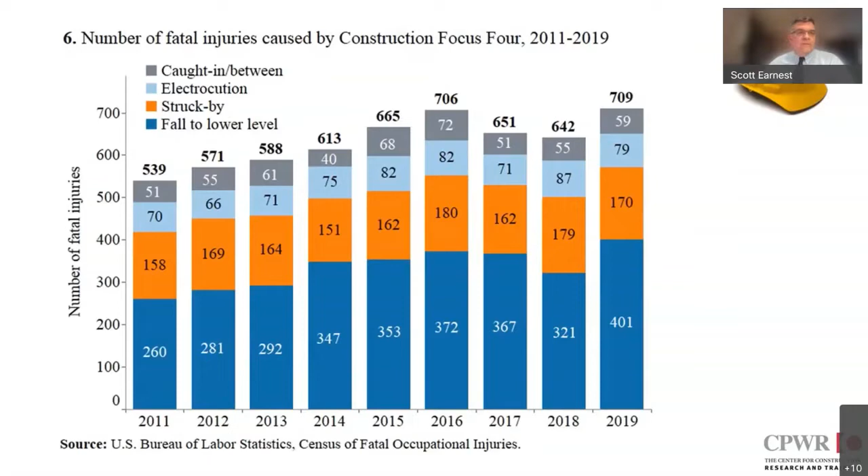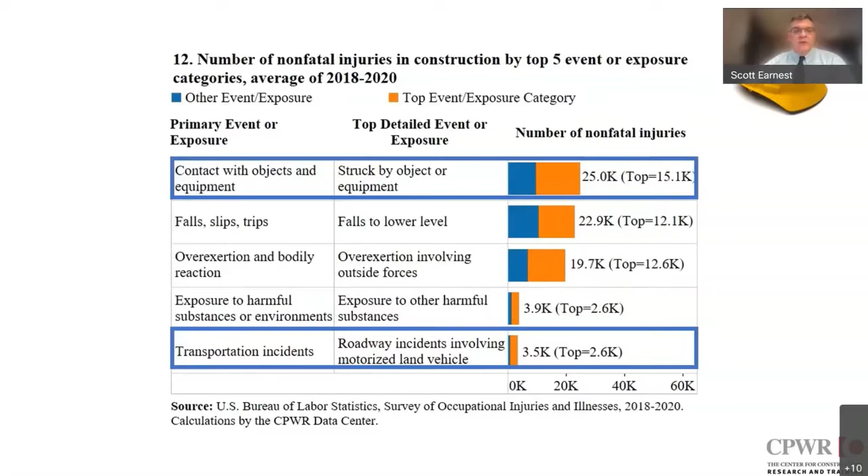I wanted to briefly mention the infrastructure bill. For those in the construction industry, the infrastructure bill will support transportation, climate, energy and the environment, and broadband. The type of construction projects that will be funded include rebuilding roads and bridges, upgrading and constructing transportation terminals and ports, repairing gas distribution pipelines, building a network of electric vehicle charging stations, replacing lead pipes, improving the energy efficiency of existing structures, constructing water distribution systems and treatment plants, and expanding access to broadband.

So again, there's going to be a tremendous amount of work going on over the next 8 to 10 years, and it's important that when this work is done, it be done safely. So we've developed a lot of different materials available on our website that can be useful, including the NIOSH website, the CPWR website, the OSHA website, as well as the ARTBA website. We just wanted to point that out and refer you to that.

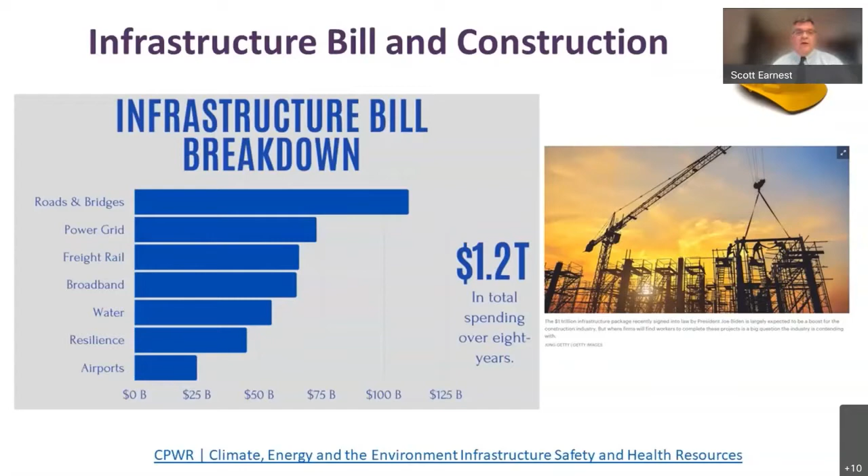We're excited to be involved with the National Stand Down to prevent struck-by incidents. For those who don't know Scott, he's kind of the chief guru here as far as construction safety goes at the National Institute for Occupational Safety and Health, and he's been there for quite a while. Prior to his current position as Associate Director of the Office of Construction Safety, Scott was the engineering branch chief in the NIOSH Division of Applied Research and Technology. He began his career as an active duty commissioned officer in the U.S. Army Corps of Engineers, and he's a registered professional engineer, a certified safety professional, and also has an MS and PhD in industrial and mechanical engineering. So Scott is a great person to have on our team and to lead us through this effort.

Now I'll introduce our panel before we get into the full discussion. I'm Brad Sant, I serve as the Senior Vice President of Safety and Education for the American Road and Transportation Builders Association. I've been here 24 years, and I'm also honored to co-chair NIOSH's NORA Construction Sector Council Work Group on Struck-by Incidents.

Also joining us on our panel, we have some very distinguished guests that I think you'll enjoy hearing. David Ferraro is the construction project manager at the Connecticut Department of Transportation, where he served for over 30 years with experience in construction project management, primarily focused on heavy and highway and bridge projects throughout the state of Connecticut. He's been involved in many of the largest and most multifaceted projects undertaken by the Connecticut Department of Transportation, and considers himself lucky to have worked on these projects with some of the best people in the industry.

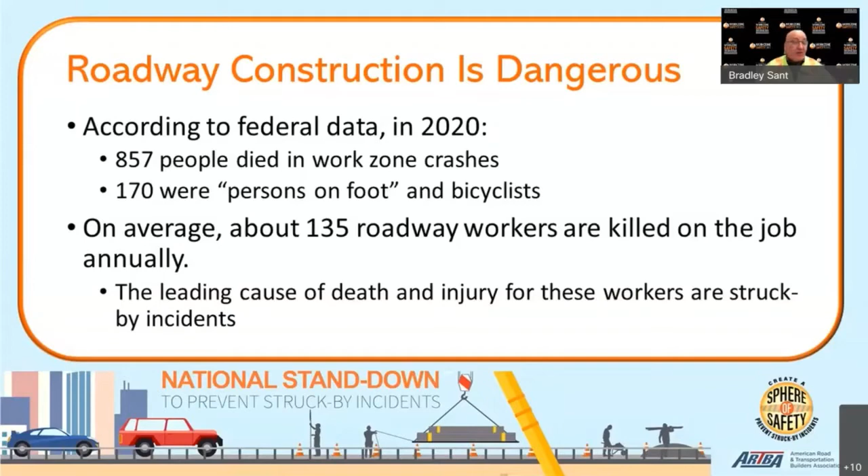There are a number of provisions in the Infrastructure Investment and Jobs Act, or IIJA, that deal specifically with what we're talking about today. One is a significant increase in the Highway Safety Improvement Program. That program is traditionally aimed at infrastructure improvements that make roads safer for motorists and prevent run-off-the-road accidents and other things. However, some of that funding is now allowed for funding automated speed enforcement in work zones. We're going to talk about each of these bullets a little bit, quickly, in order.

It also allows for creation of safety contingency funds, and emphasizes and requires benchmarks for vulnerable road users—pedestrians are among those vulnerable road users, which includes roadway construction workers. And finally, as Scott mentioned earlier, this bill delivers a 44% increase in core federal highway funding. As we get started, it's going to jump significantly between this year and next, and then continue with record levels of funding—we'll talk about that.

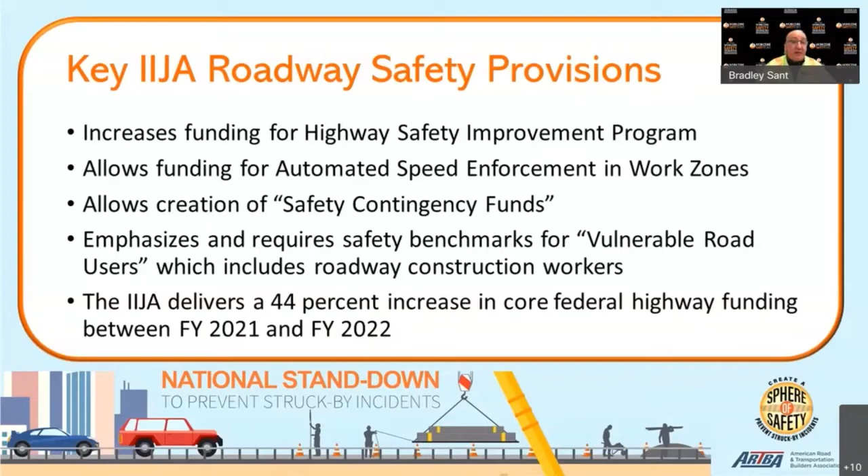Let's talk a little bit about speed safety cameras and automated enforcement. The Highway Safety Improvement Program is generally used for infrastructure improvements that try to mitigate crashes, but it can be used for automated speed enforcement. This isn't a new program, but only a couple of states have made much use of it over the years—we often think of Illinois and Maryland. Pennsylvania started a couple of years ago, New York has started just this year, and other states are picking up, so we're seeing an uptick in this.

We know that automated speed enforcement, while as a driver we may not like it too much, is an effective tool because speeding is involved in approximately one-third of all highway fatalities. And we know because of the experiences in Maryland and Illinois that those speed safety cameras do work. So we're hoping to see more of those.

And again, that variability of speed is also a big cause of crashes when you have traffic going at different rates of speed. As traffic slows down abruptly, we get rear end crashes. So evening that out through the use of speed cameras and getting people to obey posted speed limits, we see as a great mitigation for those accidents.

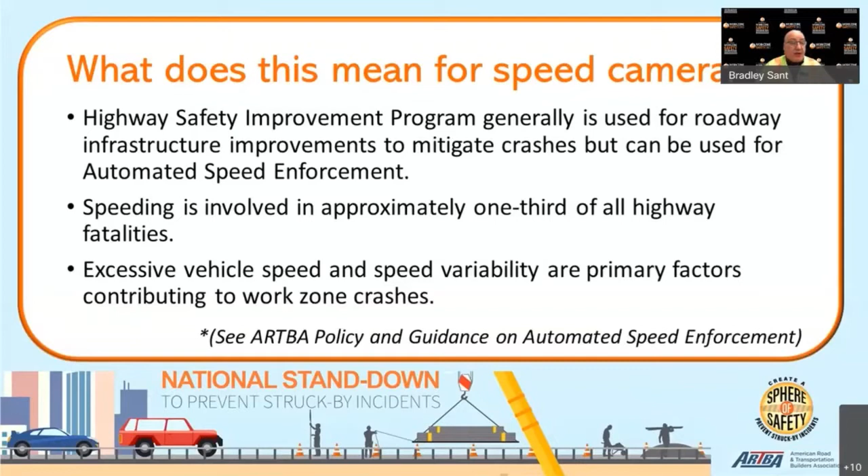And again, we have some policy on that we'll make available. Next slide, please.

So contingency funds, this is a great program we're very excited about. Basically, typically when a construction project is funded, and these are publicly funded, there's laws in place about how it's done, and typically it's a low bid environment. So the contractor that goes in with the lowest bid gets the job. It's always been a concern about what we do with those folks who are trying to do a better job, but maybe get undercut by those who are not putting as much safety out there.

What happens now when we get out on a job site and the plans were drawn up, we anticipate a certain type of temporary traffic control, perhaps we're going to use drums and cones, but we get out there and the contractor says, this is not safe. We need a change in this temporary traffic control plan. We maybe need to use positive separation where that wasn't anticipated. In the past, making such a change was very difficult because it required getting new money, and once the contract is let, there's no new money.

So what the IIJA did is it said, hey states, you can create a contingency fund. You'll set aside a little pool of funds. And then if you come up on these unanticipated safety problems and the contractor and the DOT say, hey, we do have a problem, there's money to go in and change and fix that. So we're very excited about that provision. It can allow for more positive protection between workers and motorists.

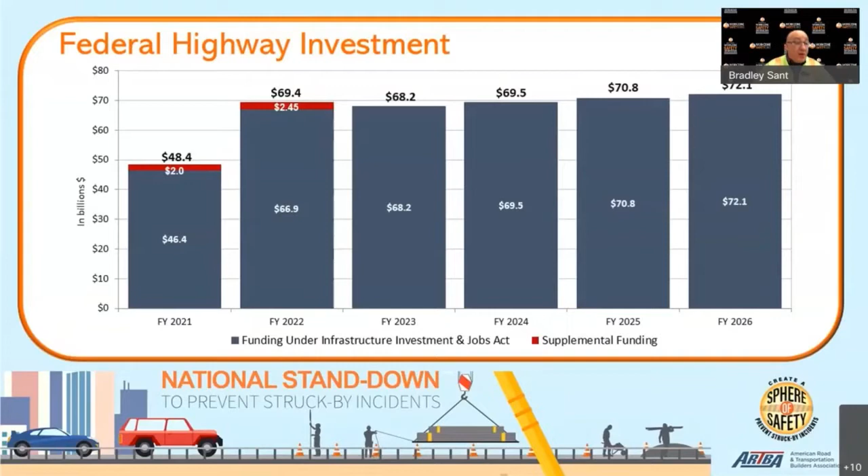Next slide, please. So if we project that on a typical road construction project, we know that on average, federal funds support about 15,300 construction projects based a year, and that's based on information we gathered from the Dodge reports. So this means that on average we have about 370 projects for every $1 billion in federal highway funding.

So what happens when we increase that significantly? We anticipate 4,000 additional work sites beginning next year. And so unless we do something to change that rate, like the chart we looked at earlier, we could see some real causes for concern - greater spending, more workers, more work sites.

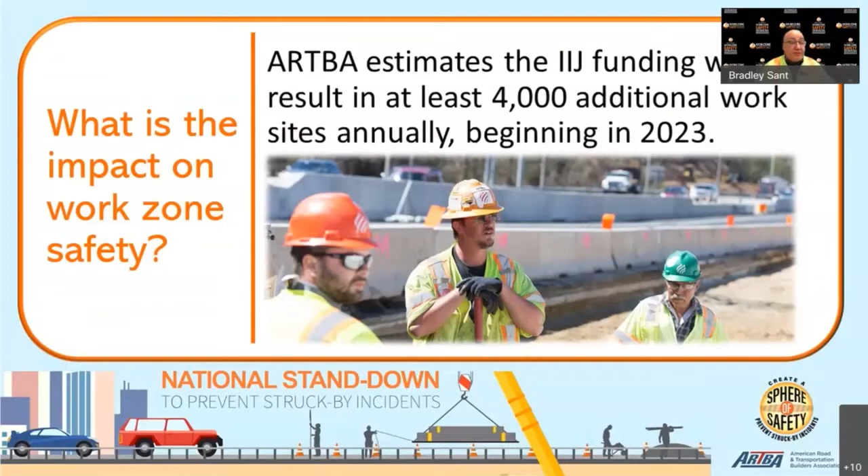And so that is why what we're doing here today, and this information we're sharing, is so critically important. Next slide, please. So that's why we're anxious to hear from our fellow presenters, and we will turn the time over to them to talk about what they have done well and what more we can do.

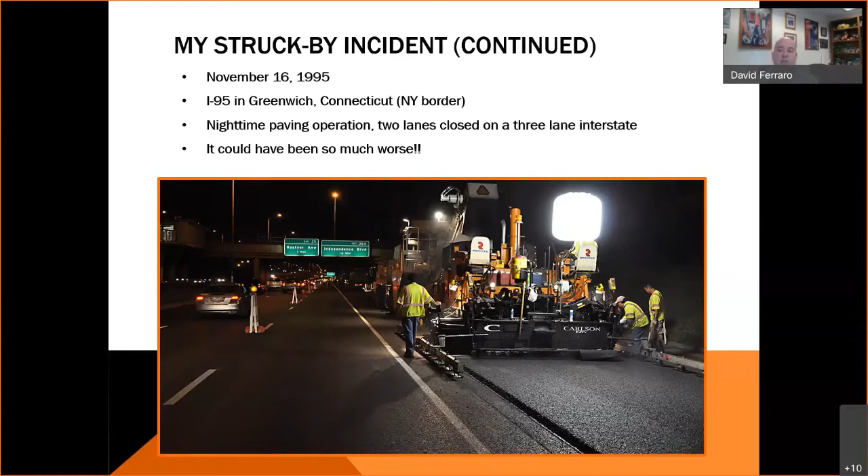Now let me take a second or a few minutes here to explain some of the things we do here in Connecticut to educate the public, protect highway workers, and try to reduce work zone accidents.

Our vision is to reach every driver in Connecticut's transportation communities to impress the importance of driving in and through work zones safely, driving work zone accidents and fatalities down to zero. That's our goal. We want to see these at zero.

Who are we? As I indicated, the campaign was founded in 1999. It's a group of all types from all different disciplines. We have volunteers from the DOT that work in different disciplines - maintenance, design, construction, like myself. We also open the campaign up to utility companies, other agencies here within the state, the local police, and the state police are also involved in the campaign.

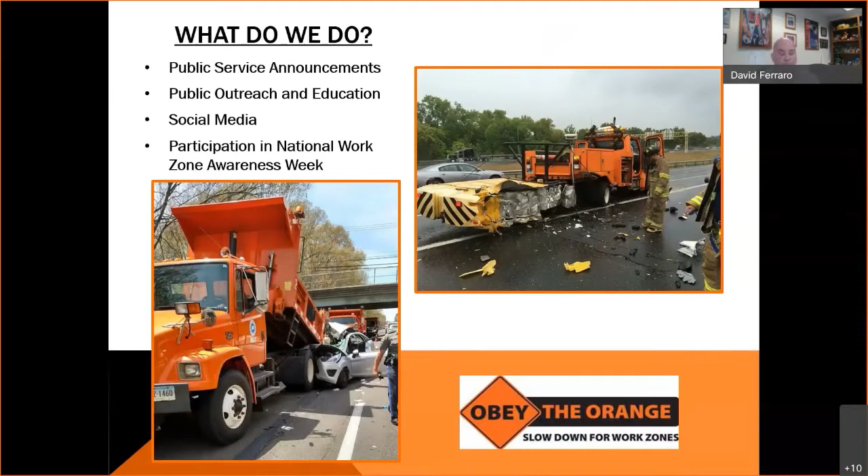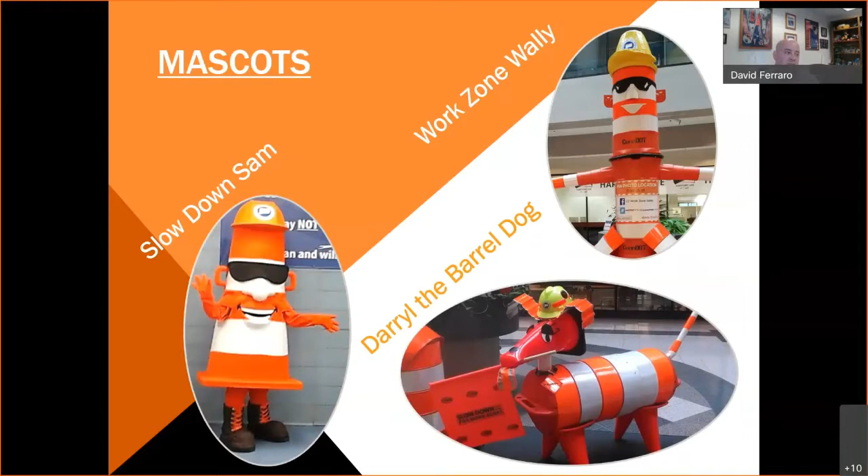So one of the ways we do that is through our mascots. We have three mascots here that you can see - Slow Down Sam, Work Zone Wally, and Darryl the Barrel Dog. These mascots go out with us on the road as well. They're great for photo ops and, again, for just conversation. Sam is a huge hit with the kids - he's the most popular mascot when we go to any of the events. It's a good thing to put a face and a name to something versus just an orange sign.

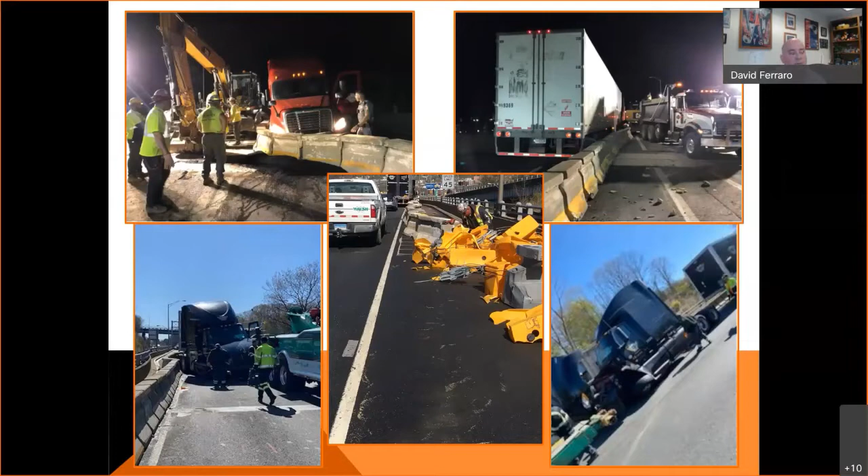A few more photos for you here. It's not uncommon to see rollover accidents out here quite often, actually, which is pretty sad.

All right, so that gets us to the next thing. So what's the future of work zone safety? The 2 most frequent causes of work zone accidents are speeding and distracted driving.

On my current project, the one I just mentioned before, the average speed in our work zone is 68 miles an hour. That's 68 miles an hour in a 45.

Now, over the years, we've done much better with improving work zone safety by enforcing things like double fines, so that the public gets a double fine in a work zone, and posted radar signs that show you your actual speed as you're driving through the work zone. But the traveling public gets complacent over time, resulting in less effectiveness.

In Connecticut, we even conduct speed enforcement on interstates. Sorry, there's a thing distracting me there. In Connecticut, we conduct speed enforcement on interstate projects with the use of our state police officers.

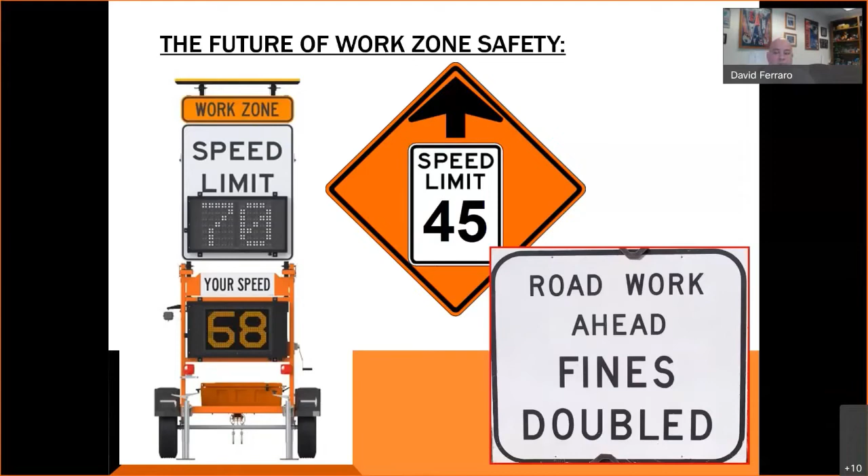We hire state police to conduct radar enforcement within our work zones. It helps, but it doesn't impact enough motorists, so we don't see lasting effects. So what can we do?

Well, Brad had mentioned this a little bit earlier as far as automated speed control. So late last year, Connecticut followed other states like Maryland and Pennsylvania to add automated speed control devices and cameras to active construction projects, which required legislative approval here in Connecticut. This summer, the DOT will implement a pilot program to test these devices and see how effective they actually are in Connecticut. Studies from other states have shown that they are very effective.

During the pilot project or program, there's still a lot to be worked out, but any motorist going 15 miles an hour over the posted speed limit in a highway work zone will have their license plate recorded. The first violation means a warning, the second violation means a $75 fine, and a third violation means a $150 fine. Tickets are mailed directly to the vehicle owner's home.

In Pennsylvania in 2020, over 200,000 violations were issued. We look forward to bringing these technologies to our work zones in Connecticut as we strive to bring work zone accidents and incidents down to zero. It's obviously pretty serious and our lives depend on it. So with that, I'm going to turn the control back over here.

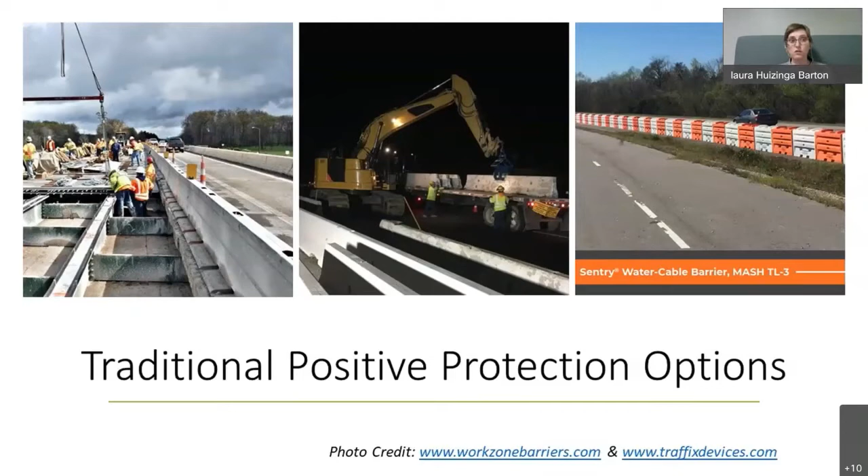So what do you do if you have not a long duration lane closure? Are you left to just channelizing devices? Well, when it's not possible to close a lane with static barrier, many designers often gravitate to channelizing devices, and they use that to delineate lane closures. These devices are great at providing motorists with guidance past a work zone. However, they do not offer any intrusion protection whatsoever.

Movable and mobile barriers provide both positive protection and the ability to only close travel lanes in the non-peak time periods, much like channelizing device lane closures for nightly lane closures or off-peak closures. These options provide safe barrier separation from the motoring public for the workers, as well as maintaining mobility by providing the lanes open during those peak traffic hours.

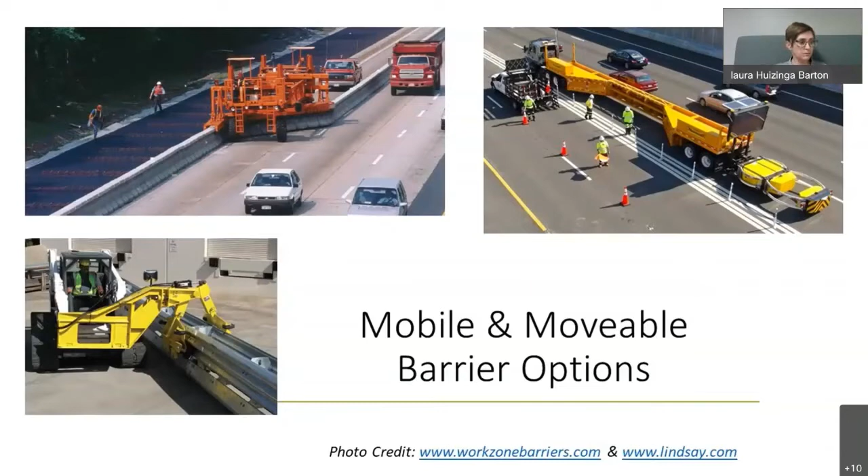If you can't use a barrier option, either static or movable, there are a variety of other options coming on the market. There are many strategies such as intrusion alarms, and these offer some awareness. These could include high-tech options like temporary rumble strips in advance of the work zone, truck-mounted attenuators, and intrusion alarms. There's a variety of manufacturers.

If I mention one, I'm going to miss one, so I'm not going to do that because I don't want to exclude anyone. But these intrusion alarms alert you when a cone or a drum has been run over, so that the workers have some awareness that you've got to get out of the way.

And then there's also manual options, and these could include frequently inspecting and cleaning channelizing devices, or maybe even just using a spotter. Now, I know that cleaning devices seems like a weird one. I cut my teeth in this industry at a traffic control company.

I got to tell you, one of the jobs they made me do is go out and take video and photos of our work zones, which I thought was a lot of fun. 3 a.m., running around with a dash cam taking pictures of the work zone. But the thing that was really surprising is that depending on the work taking place, such as concrete cutting, that concrete dust would coat the barrels and they'd virtually disappear. They just weren't there. So at night, they're gone—there's no retroreflectivity left. And during the day, they were also really hard to see.

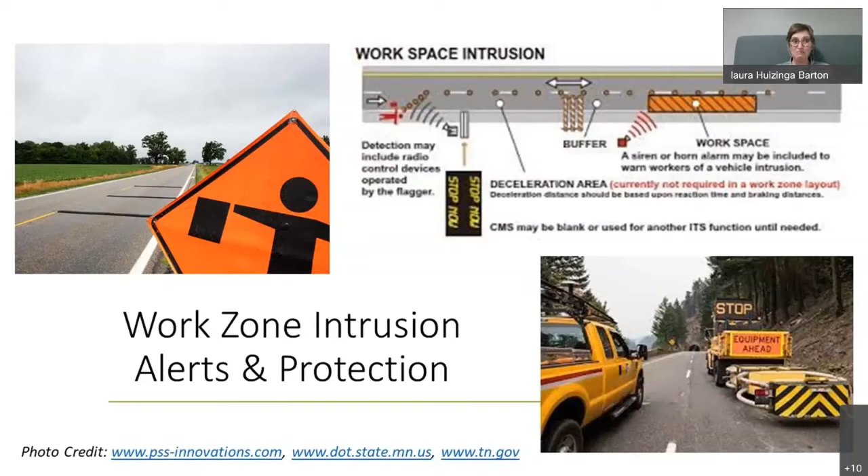So some of those things that we need to look at and consider really are some of the manual things that we can do to help provide awareness and visibility of the work zones.

But how do we eliminate work zone intrusion fatalities? I know that we're doing Vision Zero and Towards Zero Deaths, and there's a variety of campaigns underway to try to help us drive down those numbers. And honestly, it all starts with project design. Work zone safety must be considered during initial project design and scoping to determine the best safety strategy, as well as plan for the cost of this strategy.

When possible, try to design the project to separate work zone activities and motorists. Many states are allowing full roadway closures or full travel-bound closures, one direction of a multi-lane highway. That provides a safe and efficient work zone, because what better way to keep motorists and workers separate than closing the road? Now you have to consider the mobility impact of that, and in some areas it's not possible. Maybe you need a crossover, maybe there's a good alternate route, but it's a great option that's being employed.

If you can't do a full closure and it's not feasible, you might want to consider positive barrier options. That could be static, could be a mobile barrier like the mobile barrier trailer shown a couple slides ago, or a movable barrier like the product Lindsay—the company I work for—represents. If positive protection is not a viable option, try to provide work zone intrusion prevention options.

However, I got to tell you one thing that's not going to work, and that's leaving safety up to the prime contractor. As Brad said, it's a low bid environment. And if you leave it up to the prime contractor and haven't specified the level of separation and protection required, it is always going to be devices like you see in this picture here, channelizing devices, because those are the lowest cost option.

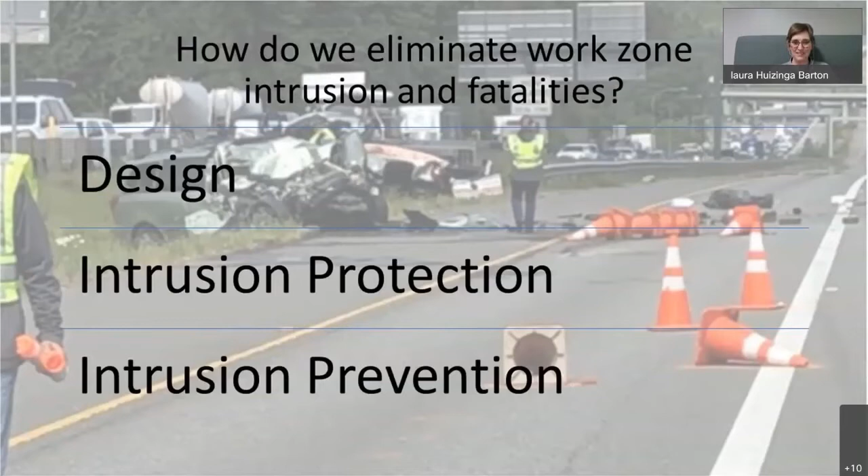Apparently some good stuff. Well, good afternoon. I was going to say good morning. I guess it is in some places. It still might be morning. So VDOT...

Here in Virginia, we had some challenges when COVID started, just like everyone else did. But two things that helped us be successful in the reduction of fatalities: our Virginia OSHA, or Occupational Safety and Health, passed a temporary infectious disease program that required us to put certain controls into place. Along with that, we also had some governor directives that required us to do some things as well. So those combinations, and working with our contracting partners, we were able to keep an open line of communication going so that we were able to continue to work, and we kept our practices in place where we protected our employees from COVID. With all that, in 2020, our partnership with industry allowed VDOT to complete 2,000 more projects, totaling over 30,000 more lane miles, with an increase of about 500,000 man hours worked. And we were able to reduce our fatalities from 17 to 11 fatalities that we could attribute to the work zone.

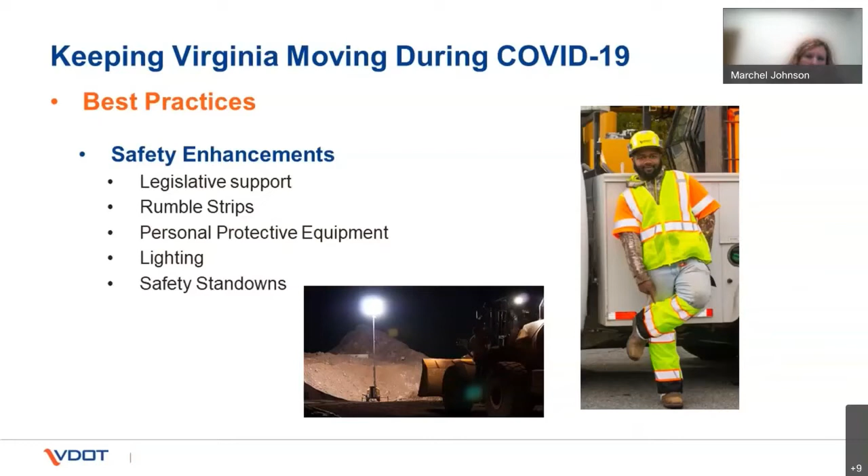Well, there we go. Some of the other best practices or safety enhancements that we've done is we're using more and more programmable message boards, whether we use the pull behinds to communicate to our public, or whether we have the overhead traffic signs, we're using those more and more.

We have a lot of smart work zone devices that we're implementing into our work zones.

I think one of the other big things for us here in Virginia, again, Virginia OSHA, we're a state plan state, so they have some unique standards. One is the reverse signal operations, which requires either an audible alarm or a spotter, depending on the situation. And they enforce that. They have also adopted that they will enforce work zone setups.

Lots of times we get tapped to ask questions when it comes to maybe some safety violations that have occurred. They do come if there is a fatality or significant injury in a work zone. They are notified. They do come. A lot of them have been through the work zone basic or intermediate training, so they're aware of it.

We're also always evaluating safer technologies, and just to name a few, we have a work zone customer survey tool. It's on our website that the general public can go through, do a survey, provide feedback, ways that we can enhance or look at those things that we as people in the work zone or in the traffic environment see on a day-to-day basis, but the general motoring public may see it a little bit differently.